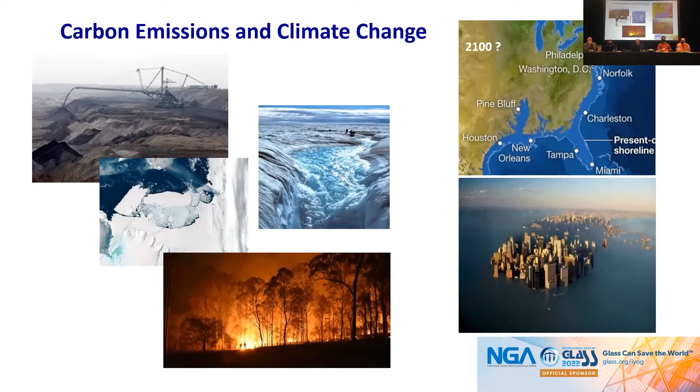It costs someone an awful lot of money to deal with those kinds of changes. So let's try and stop that from happening, and that's the carbon problem, right?

And so the challenge here is that if we're going to address carbon as a nation, as a globe, we need to address both operating and embodied carbon, but buildings are about 50% of the problem. Frequently, you see the number is more like 40% for energy, but that's the operating energy. If you look at the embodied energy and carbon in construction, it pops up into the 50 range, and it varies by country, but in round numbers, it's something like that.

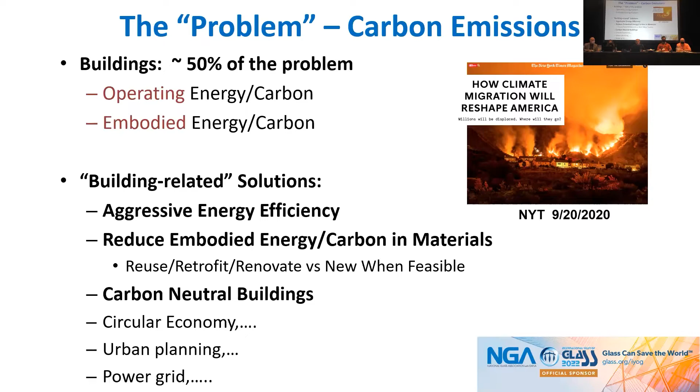So if we're going to solve the big picture global and national energy and carbon problems, buildings have to be part of the solution. Part of the problem now, they should be part of the solution. And the good news is there's a whole host of things that we can do about it. And glass and windows are going to play an important part in that.

So lately, in the last 6 to 12 months, lots of organizations at the global level, at the national level, the state level, this is NYSERDA, are coming up with plans of how do we get to 2030, 2040, 2050, and get to some variant on carbon neutral or net zero or half reductions in carbon. There's a whole variety of different flavors, but the thing that characterizes all of them is that they're big changes in business as usual.

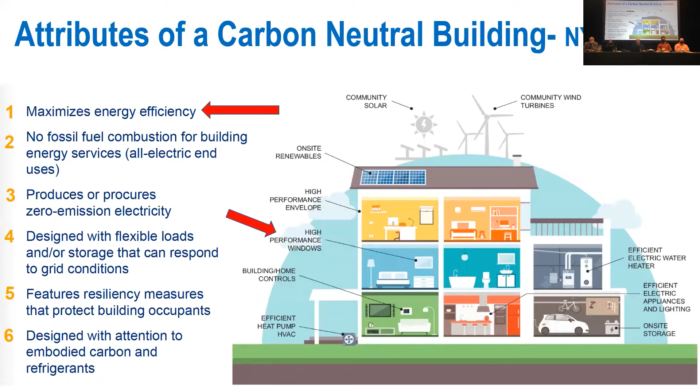The emphasis on efficiency has some history behind it. This is from 1965. This is a 40, 50-year time frame. The blue line in the middle is actual US primary energy use. And it rose a fair amount at the beginning, then flattened out. That gray stuff up there is, had we not had efficiency over the last 30, 40 years, that's where energy would be now. And the gray part is essentially what we've saved by low-e windows and insulated water heaters and all that good kind of stuff.

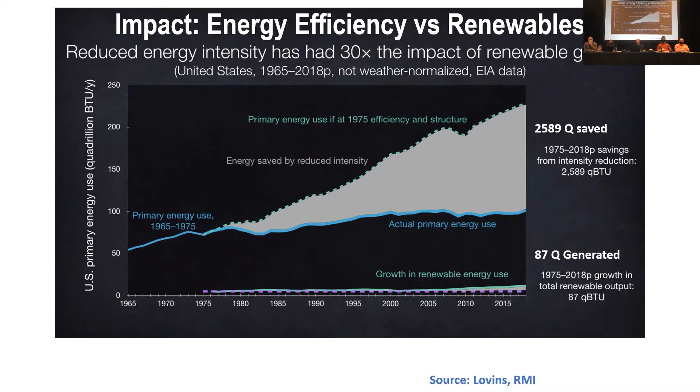The little piece on the bottom there is PV and wind and all those other good new non-carbon sources. So they're growing at a very fast rate, which is great. But the biggest savings historically have been by being efficient to start with. And so that's part of the theme here. Keep doing that. And so we're not the only ones thinking about that.

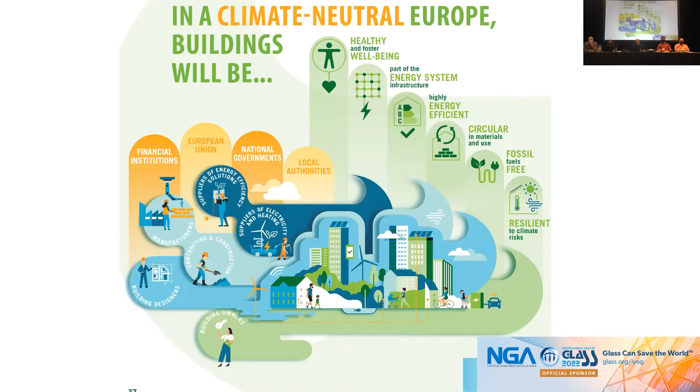We had a discussion at lunchtime about what's going on in Europe. Europe is, generally speaking, ahead of us politically anyway, in terms of thinking about what needs to be done and why. There's all kinds of interesting reports out there about the role of buildings in a climate neutral Europe, and then taken from Glass for Europe. This is a report they did. Europe set these targets of so many megatons of savings.

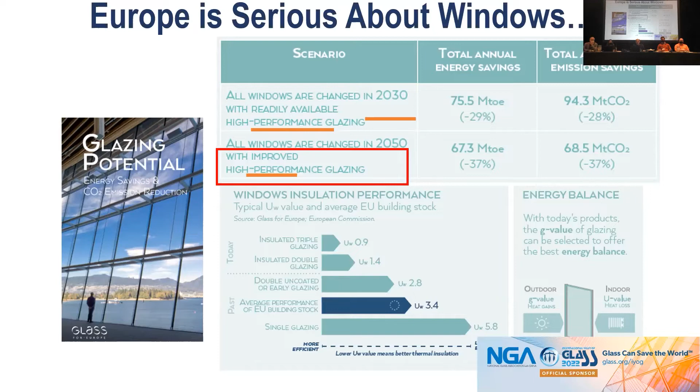And this study says, if you retrofit all the buildings by 2030 with what's in the market now, you save the amounts in the top there. If you retrofit all the buildings with improved technology for windows by 2050, you save even more. And the bottom line is, glass could provide about 1/3 of all the savings that are needed or wanted in Europe if you do the things we're talking about here. So, that's maybe a model for what we should be doing in the US to try to point out to policymakers and others what the options are.

So this is part of my thesis. If you've heard me talk before, I've said this so many times, it's probably boring, but we can do a much better job with what we have. We can get to the point where the facade, the glazing system can be equal or better than an insulated opaque wall, essentially for any climate in any area, in any orientation.

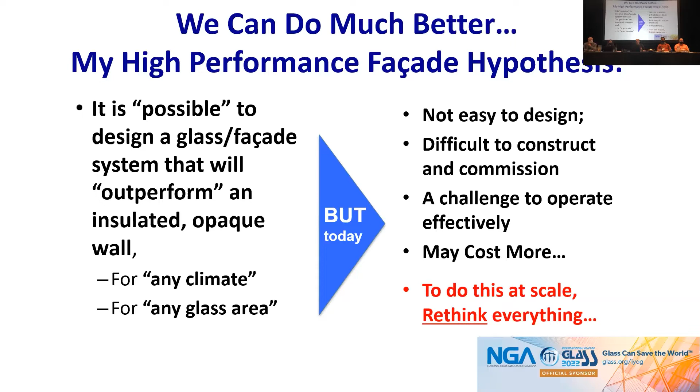Now, that's a techie statement to make. It's not going to be easy or cost effective, but it can be done. It technically can be done. I can show you how to do that. We've done a bunch of models and simulations of what this might mean.

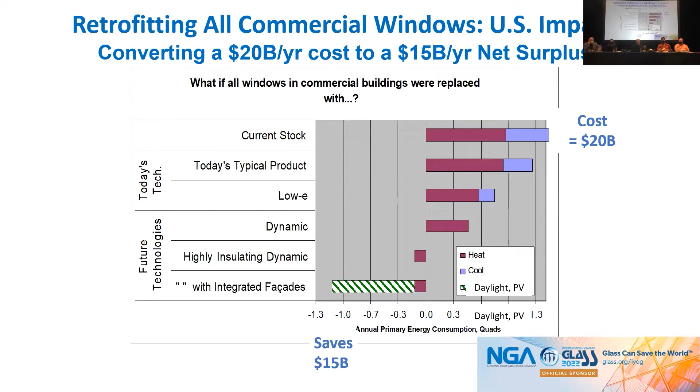Of course, that's if you can magically change every building in the country, and that ain't going to happen, as they say. So we do need to pay attention, or more attention, I think, to the properties of those windows, the performance of those windows. And in the upper left here, there's the energy carbon stuff. That's the theme of this talk anyway.

But for the last 2 or 3 days, this issue of people and comfort and productivity and daylight comes up over and over and over again. And that's good. It's coming up in the real world all the time. We need to be paying more attention to that. In general, the things that you want to do in those areas are consistent with what you want to do for energy and carbon savings as well.

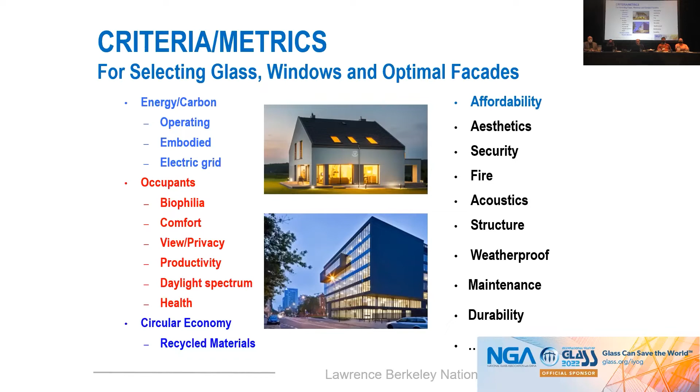In addition, on the right-hand side, if you're an engineer or an architect, you have to worry about all those other mundane but critically important issues as well. So that's why, to some extent, this challenge of coming up with the right windows and glazings is tough. It's not easy. So what I'm going to do, I'm just going to look at a piece of the problem today, just really focusing on the heating issues.

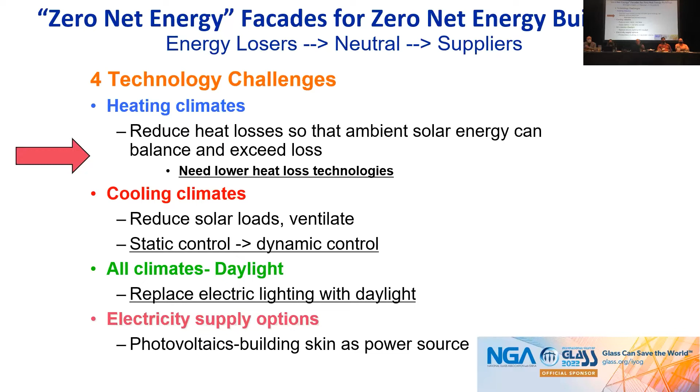There's lots of other important things that need to be done here if you're going to end up with a building that's net zero. If you screw it up, you could end up with a building that has very low heating energy in winter, but is terrible in summer. That's obviously not what we want. And then my other theme here is going to be, although I'm talking about the bits and pieces, the insulated glazing parts, this is really a systems problem.

If you've seen me talk before, I've shown variants of this slide. There's a lot of moving parts to the problem, and you don't have to deal with every one of them on every project or job, but they're all there one way or another. All the stuff in the middle and the right is other building systems, and there's all the pieces on the left that are the pieces and parts of the facade, and then there's the challenges of how they integrate.

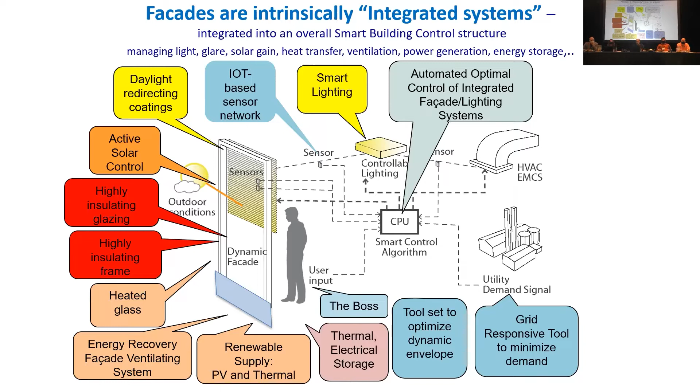For example, how the daylight control and the glazing deals with the smart lighting. If you don't dim the lights or turn them off, you aren't going to save any energy. So this integration issue, I think, is a huge challenge. And we talk about integration in terms of spacers and glass and frames, but I'm talking about bringing in maybe an automated shade, bringing in daylight sensors, and then bringing it into the rest of the building. And this is a theme that's been picked up in the industry.

Is Rick around here somewhere?

I've used this all the time from Oldcastle. This is a real challenge. It's not easy to get all the parts together and make them work at the same time at the right time. And my theme here, of course, is from the IGU to the facade, but from the facade, excuse me, to the whole building.

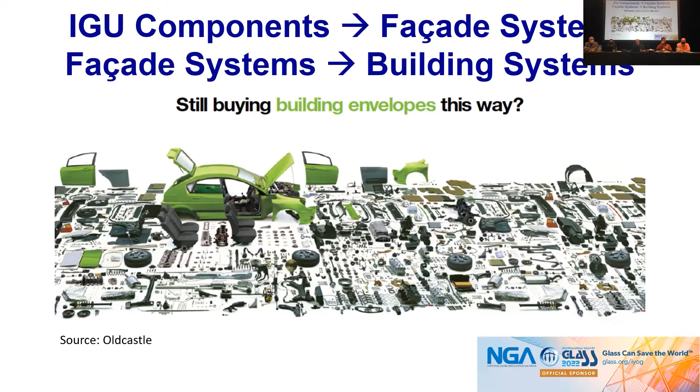So one of the most important, there's a lot of practical reasons for doing this, but my reason comes back to how much can you afford to invest in energy efficiency and how do you pay for it? So here's a different version of my integrated systems problem. And I'm going to look on the left here at the facade. I want to invest more. I'm arguing I want to go to maybe triple glazing and smart glass. That's going to cost more.

But if I move to the right here, I'm going to spend money on the heating and cooling system. And these days, I'm going to spend money on either new parts of the grid or PV or wind power or whatever, battery storage maybe. I'm going to get to a carbon neutral building. So I'm spending money in multiple places. And the simple theme here is that if I invest more on the left, I can take money savings from those heat pumps and maybe from the PV and the stuff on the right.

And we've been involved in projects where they've gone through and actually calculated it out. I'll give you one example later, where it's actually cheaper from a building's point of view to put in better glazing because it saves more money elsewhere. This is first cost I'm talking about. There's an operating cost savings that's going to happen as well anyway.

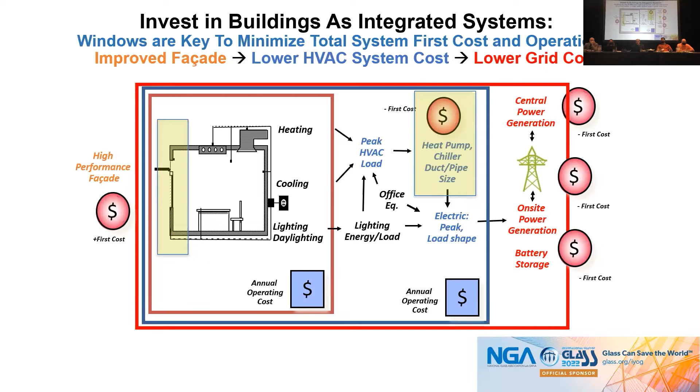So there's a lot of talk now. If you're going to get to 2050, with the savings that we need, you have to address existing buildings. You can't build your way out of this problem with new construction. Something like 50% or more of the buildings that will be in 2050 are here now. And most of them, unfortunately, are single or maybe double glazed. So there's a lot of people now thinking about how do you retrofit? And there's this theme called deep retrofit.

This is a report published recently by ACEEE, the American Council for an Energy-Efficient Economy. And they say, okay, strategy one at the top is you do everything at once. You've got money and expertise and you figure out all the things to do like I've been talking about, you do them all at once. More plausibly, when time and resources are limited, you go through a step process. And the critical thing here is you do the envelope first.

It's dumb to go in and put in a new heating plant that's sized to meet the existing crappy envelope and then go back in later and change the envelope. And the key point of this is if you do the envelope first, you downsize the HVAC and the money you save can help out there. And there's other variants here as well. There's some intermediate ones as well.

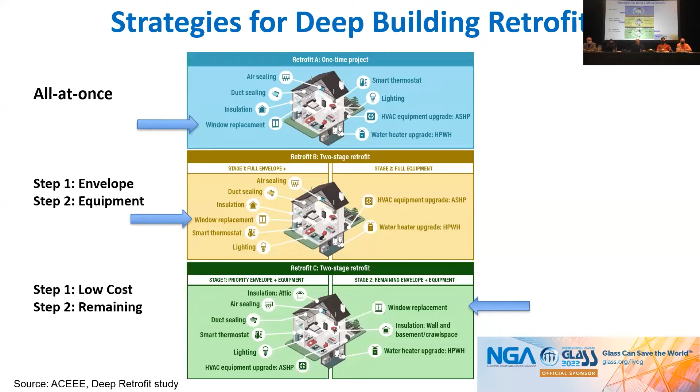So there's this challenge of getting the technical piece of it right, but getting the business solution, the construction solution right at the same time. And I'm not going to go into some of the details here, but the challenge is making these two parts of the problem really work as an integrated system. I'll come back to some of this later.

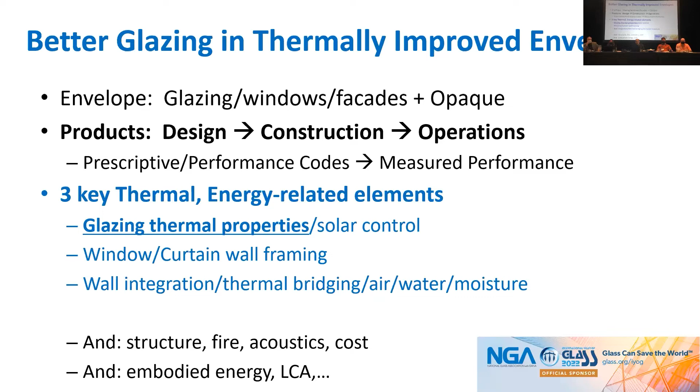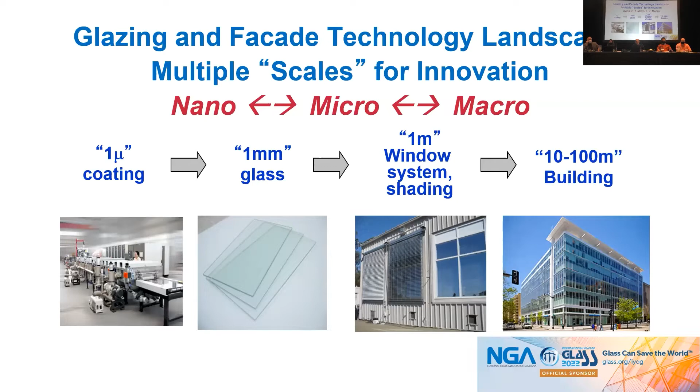So I want to spend a chunk of time now drilling down onto the IGU world. I'm just talking here about glazing properties, which is a subset of the facade, which is a subset of how you put it into the wall. You were talking before about thermal bridges and all the different pieces and parts there. Again, it's a complicated problem, but I'm going to look a little bit at, can we make the IGUs, the glazing themselves, much better thermally? And we have some levers to pull here. We can play with coatings, with glazings, with the glazing system, and to some degree the whole building.

Sort of talk about the future history of insulated glass. This is my fork in the road here. We've come to a place where we have to go to the left or go to the right, and what are we going to do about solving the insulating glass problem? So I'm going to spend a little bit of time looking at some housing issues with glass because I have a lot of data on that. The underlying issues are similar on the commercial side.

There's about 48 million homes out there out of 100 million plus or minus that are largely single glazed, 20 to 30 million a year being retrofit, but that's out of a population of 1.4 billion. So there's a huge opportunity there.

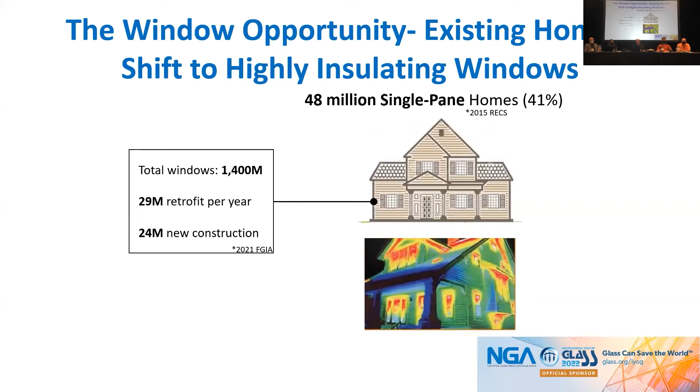In new construction, you might say, oh, well, that's okay, we have it solved now. We're using low-E double in new construction. But with the new IECC code, look at the numbers here. In a typical house that meets IECC, the windows are 8% of the envelope area, but 47% of the peak heat loss. Windows have gotten better, but the rest of the building got better faster. I mean, ceilings are R60 now. So that's a challenge and an opportunity.

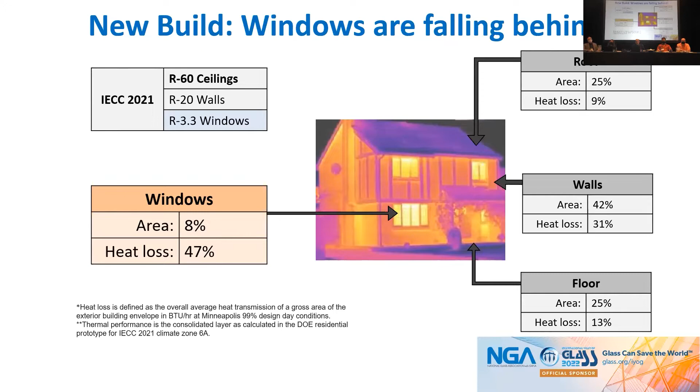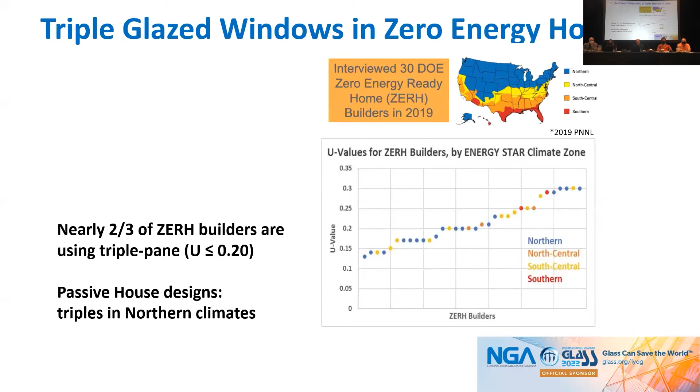Now, that's not to say that some people aren't using triples or aren't doing better elsewhere. We've done some surveys around the US. People who are doing zero energy homes, for example, these are 30 projects. Part of the group I work with went and interviewed builders, and about 2/3 of the builders were using triple glazing. We talked to the passive house world. A good part of those buildings are triples as well, especially in northern climates. So the challenge here is, why haven't we made more progress in triples?

And so here's my little universe of glazings. The ones in green here, the world of double with different flavors of low-E in different places with gas fills, this represents 80 to 90% of the market. I want to talk briefly about everything on the upper right there, what I'm calling emerging and future, and then really focus more on triples and two different flavors of triples, a conventional triple on the lower left and this so-called thin triple in the middle here.

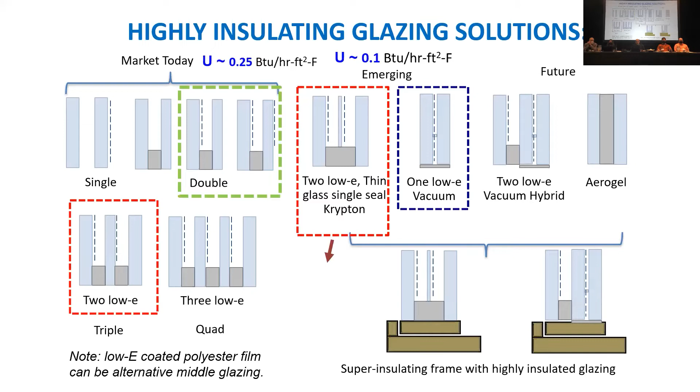So one set of emerging tech is VIG, vacuum insulating glass. These products have been around in limited form for 20 years. There's some good products out there now, some very successful projects, but not a lot of market impact at the moment. A lot of new buzz in terms of new hybrid designs for windows, new R&D, new generation VIG, which hopefully will be cheaper. Cost is always an issue here. So there's good news coming here, but it's not here now.

And if you wanted to plan a strategy for the next 5 years and address tens of millions of windows every year, VIG isn't going to be ready yet. And yet is the operative word. It's a chicken and egg as well. If the market is out there for tens of millions of low U value windows, then investments will be made faster and sooner in VIG plants. So all the stuff is connected.

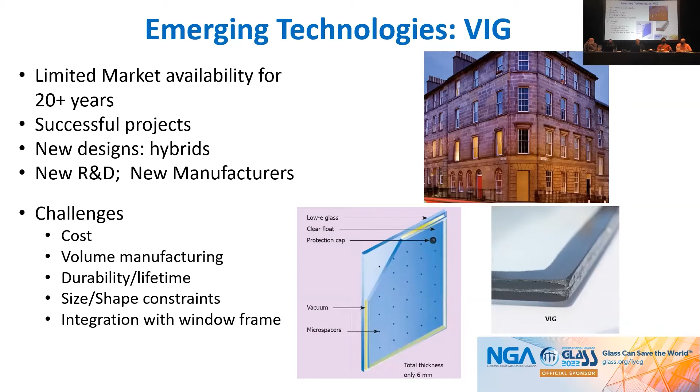The other area is aerogel. How many of you have heard of aerogel before? Everybody's heard of aerogel. Probably a bunch of the startups have come to you guys and said, hey, I got the latest, greatest, best thing, give me a little money. I've been involved in this stuff since 1980. As a scientist, it's wonderful stuff. Solid smoke is the way it was first described. The lightest material known to humankind. But DOE has been putting R&D money into it for decades, and there aren't yet real windows.

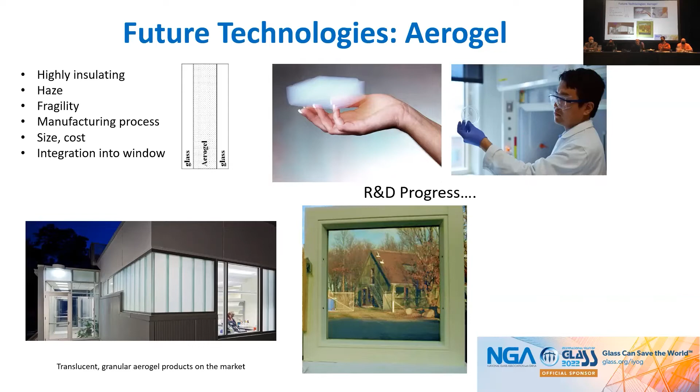Now, in the last couple of years, more funding was put in, a couple of new players have come into the market, and I heard from Tom recently that one of them looks like they might have something that looks good, but frankly, I've heard that before. It's not a statement on them. But I should mention on the lower left, there are products out there now. These are granular aerogels that are diffusing. So they're highly insulating, but they're granular and diffusing. If you want that product, it's available from multiple sources. If you want a clear pane of aerogel, you're going to have to wait a bit more.

So I'm going to focus here on the options that are on the market now, which is basically flavors of multiple glazing. I'm going to bounce back and forth a little bit between the residential side and the commercial side. Frankly, I have more data on the residential side, but the underlying technology for the IGUs is pretty much the same. So if you look at the CPD, the NFRC certified product directory, this is U value along the top scale here. You see the 0.2 U value over the blue there. Those are the triples. And then you see the doubles at about 0.3. And it looks like there's a lot of good triples there in that product directory.

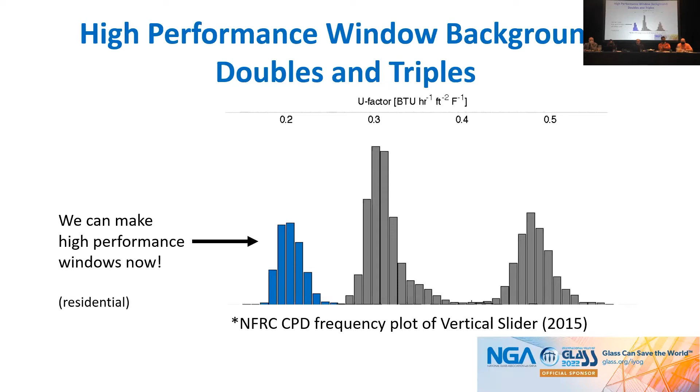But if you look at what's actually in the market, so this shows from 1970 up to now, R2 normal double glazing is the solid line. The low-E world is the dotted line, and triples are kind of hugging the bottom axis there, and they have been for 20 years now. 3% market share is what Ducker thinks it is now. I'm guessing it's less in the commercial space. So not much has happened.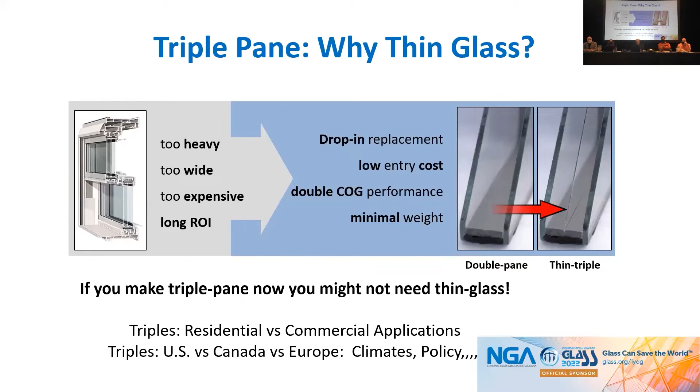So we looked at that and said, well, can we come up with a triple that's not heavy or wide, so it will fit in the existing pocket of a normal US domestic window sash, which is sort of 3/4 inch IGU, and actually deliver the performance. And we actually thought about this a long time ago. This is a patent I was one of the co-inventors on in 1991, long since expired.

Technically, it would work like a charm. The problem was in 1991, you couldn't get the thin glass that is in the middle there, and the Krypton gas. Well, Krypton was available then. It wasn't cheap, but it was available, but you couldn't get the thin glass.

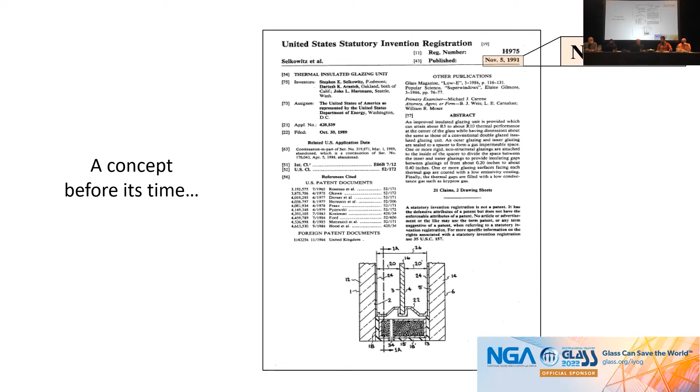About 5 years ago, I went back and looked at it again, and courtesy of your cell phone and your laptop and your TV, all of a sudden now there's a lot more thin glass around, and it's a lot cheaper. And so we looked more carefully at this, and we thought there was an opportunity here to get to triple performance, again, roughly an R5 window, a 0.2 U-value window, by packaging it in the existing glass package that was used in most of the residential sector.

This shows on the right the sort of basic concept of the thin glass in the center with a single spacer. The other reason to have a single spacer is you only have 2 possible leakage pathways, but there's no reason why you can't make the thin glass as a center layer here in the middle.

And some of the designs that partners have come up with, notice the one on the right talks about a 0.7 to 1.2 millimeter center glass. The one in the middle is 1.6. 1.6 is made by, I think, all of the primary glass guys now. The 0.7 to 1.2, that's more of a specialty product at the moment. I'll come back to that in a second.

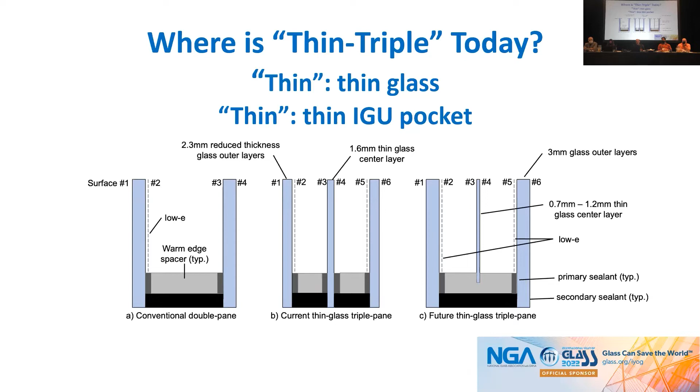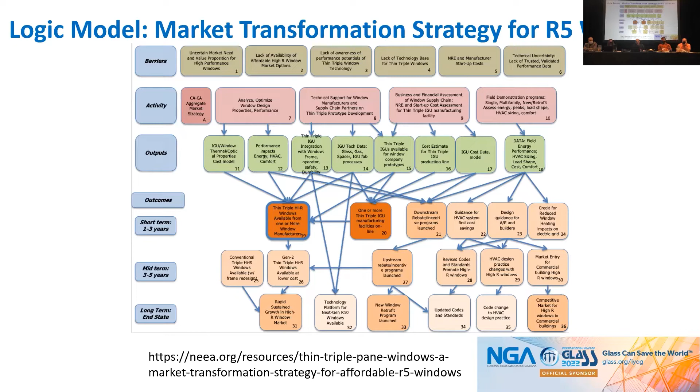And they've developed a bunch of interesting products out there, somewhat concept, somewhat real products. There's been a bunch of buzz in the industry, some of which has come from sources you guys are involved in here. And it's moving ahead slowly, but we're not committed to the thin triple per se, we're committed to triples, and the underlying problem is just not this huge market push. So let me drill down a little bit more on what's going on and why.

So the first thing to comment is that with the triple, you get about an R8 center of glass. So I'm trying to be careful here, I'm going to bounce back and forth between IGU center of glass properties and window properties, okay? So in the IGU center of glass world, a triple gives you R8. If you've got a slightly larger glass package, like an inch, an inch and a quarter, you can put 2 pieces of thin glass in there, you get an R14, which is roughly the kind of target that some of the new VIGs are looking for.

So that's great news. That says that you can get an R14 center glass without a VIG, with a quad glazing here. And then, of course, you've got to package it in a sash and frame and all the rest of it. But that's the starting point.

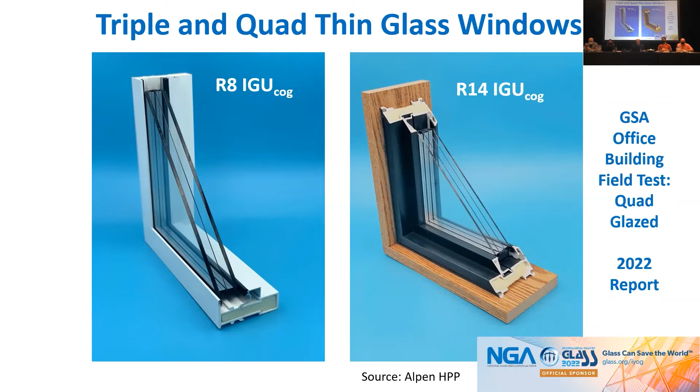Now, GSA recently, on the right here, field tested a bunch of quad glazed windows in some office buildings in Colorado. And they reported great performance and fast paybacks. The fast paybacks, of course, I mean, they saved a lot of energy. The payback piece depends on what kind of pricing they were using, and I don't know those numbers. But the good news is they work. Of course, there's no reason why they shouldn't, but they seem to work just fine. The building owners were happy. Comfort was an issue, which I'll come back to in a minute also.

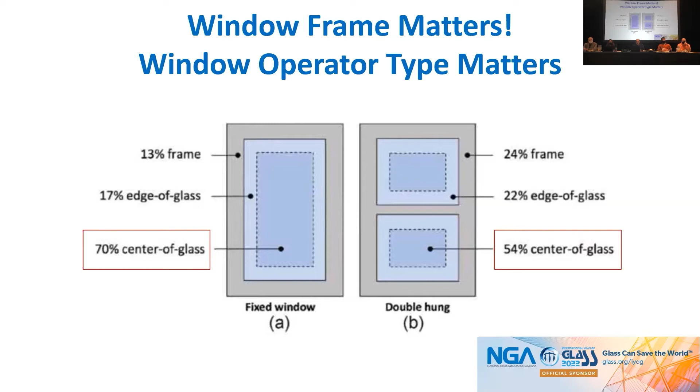And I do want to, again, clarify the IGU issue, center glass IGU from sash and frame. This is a worse problem on the residential side when you've got a lot more fractional area of sash and frame. But just as a qualifier, I'm going to show you a couple slides now where I talk about window properties and IGU properties. So that's why I wanted to make that distinction.

So here's a plot. On the left-hand axis is the center of glass U value, and on the horizontal axis is the window U value. And the bar in the middle with the tinted color, that's a 0.22 window U value, and that number is there because that's what Energy Star wants to change the northern value to.

I'll jump ahead for a second. Energy Star is in the process of changing all of their required values. The northern zone, which is about 40% of the country, we hope in the next year or so, I think this was reported on earlier yesterday by Tom, it looks like they're going to go ahead and pick 0.22 as the magic number. And from my point of view, that's great because that's going to require the industry to go to triple almost always. And so all the things that we talked about that you could do or might do or can do, we hope that they'll actually do it to meet that requirement.

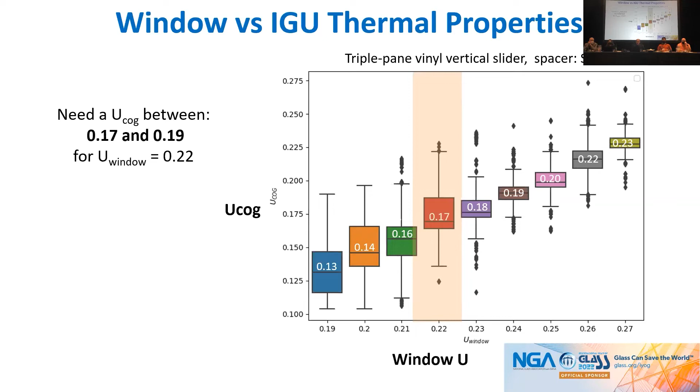But this shows that there's a whole wide range of things that you can do out there in terms of getting values at 0.22 and below. You can get down to 0.2, 0.19, and the rest of the scatter here gets to the spacer being used and the sash and the frame being used. So there are a bunch of steps, and this new Energy Star stuff would come into play in 2023. There's a bunch of things that have to happen in order for the industry to be able to deliver products at some scale by 2023. The good news is we've got a year and a half maybe to make those changes.

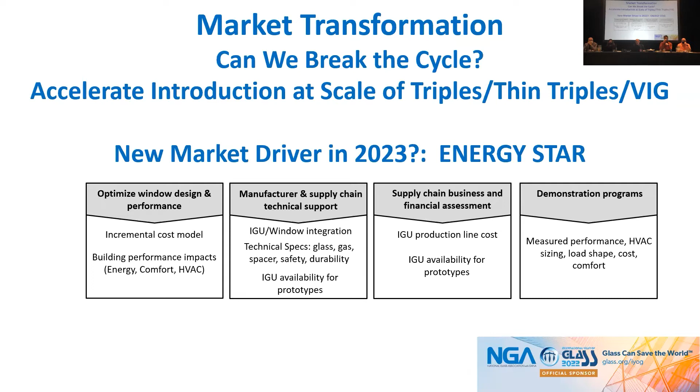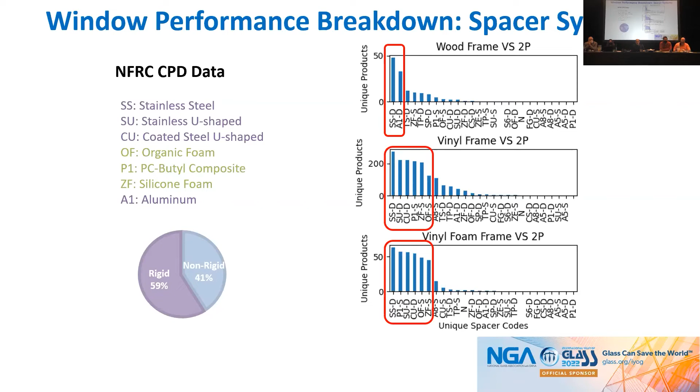And I want to just walk through a little bit of what you can glean from the current NFRC certified product directory in terms of what's out there. So we did a search. So Robert Hart, who leads this whole effort now at Berkeley Lab, did a search on the CPD database. And you can look at, for any given window type or any given U value type, what types of spacers are being used. So this is just a plot showing some of the different spacers used in a wood frame, a vinyl frame, vinyl foam frames, different choices and so on.

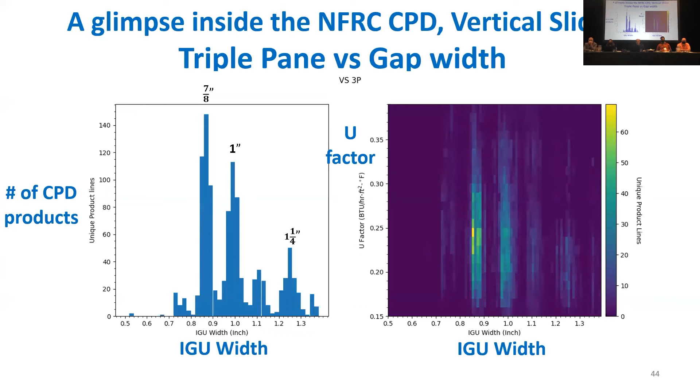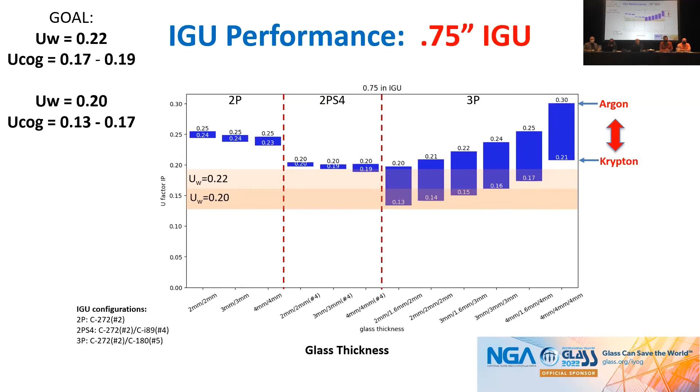So this is 3/4 of an inch. So kind of blur your eyes a little bit. Watch what happens when I go to 1 1/4. Big change, right? Actually, the doubles and the double surface 4 low E, they don't change much, but the triples now, all the triples are below the lowest end, and the difference between argon and krypton is hardly there at all. So basically, one of the challenges with the thin triple we're working on is krypton has gotten to be expensive and a challenge. If you're using an IGU that's a bit wider, you don't need krypton.

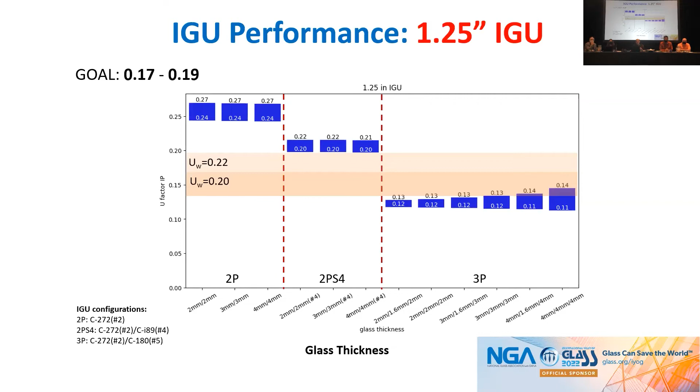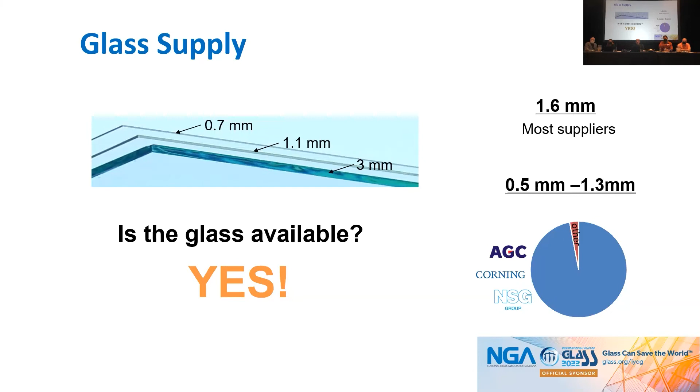So I want to go sideways for a second here. Flat screen televisions. How many of you have a flat screen television? Everybody. If you're not raising your hand, you're lying. Do you have any sense of what the volume of glass in flat screen TVs is compared to windows?

So here's a simple data point. This is approximately right. 50 million windows sold to homes last year. Each window is what, 12, 15 square feet average size, something like that. 40 million televisions sold to homes last year. Each of them is about 10 square feet roughly. So basically, the TV industry is putting as much thin glass into American homes every year as the window industry is, to within a factor of 2. That's your takeaway for the day, okay?

So basically, now, it's not the same industry, I get that, or it's not the same fabricators, and the production line for making a flat screen television doesn't look like the production line for making a window, but the underlying technology to make the glass, to cut the glass, to ship it, to clean it, do everything you possibly want to do with it, it's out there.

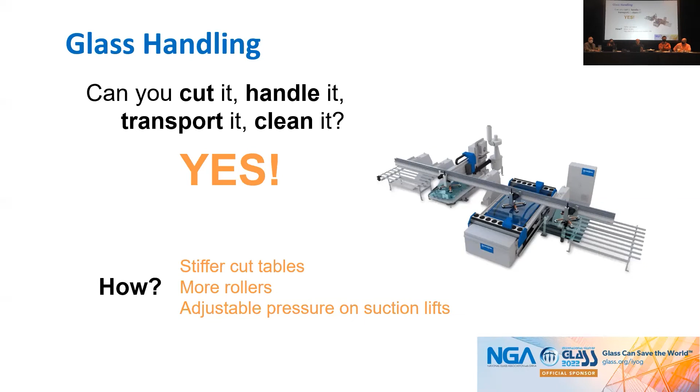It just doesn't happen to be in this room necessarily. But that means that if you want to play with it, you just go to someone that already knows how to do it. You don't have to do research and start this stuff from scratch.

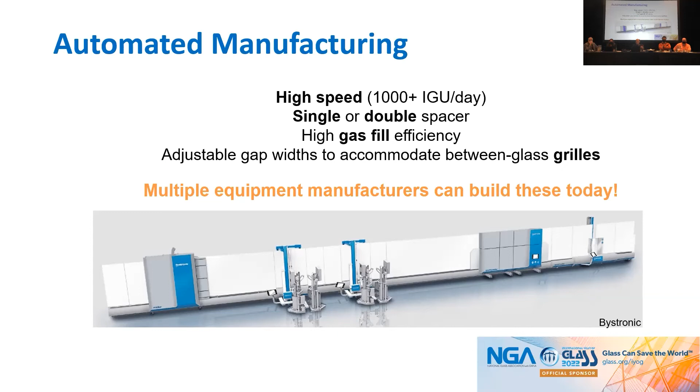Automated manufacturing. We've talked to all the IGU fabricators. They all say, we can do it. We have to tweak our design, our equipment a bit, to change the suction cups. We have to change this or that. But again, this isn't rocket science stuff. This is engineering. They basically all say, if a customer comes to us and wants one of these plants, we'll design it for them.

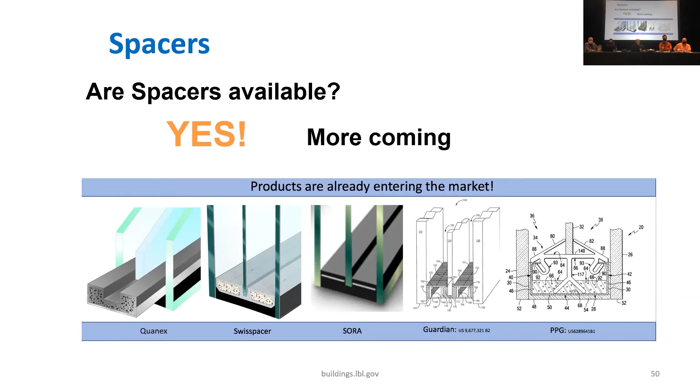Spacers, this is taken from some literature. There's a couple of spacers out there. Now, these are the single spacers. If you want the normal double spacers, no problem at all. We'd like to see more single spacers because we think there's an advantage there. There's a bunch of patent literature on this. There's a couple of products out there. Basically, there are options.

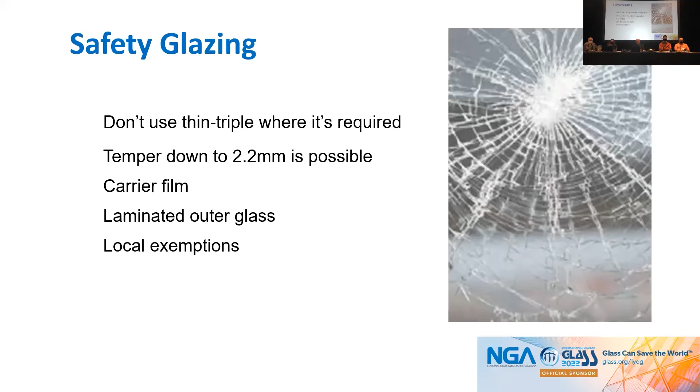And then one interesting thing is safety glazing. You can't temper thin glass. You can put a thin glue-on film on it, which can help in some cases. So basically, if you absolutely need conventional temper or need safety glass, this may not be what you want to do. Principally, you can temper down to 2.2, which we include in the thin glass world. But that's a bit tricky. So you guys know more about all that than I do.

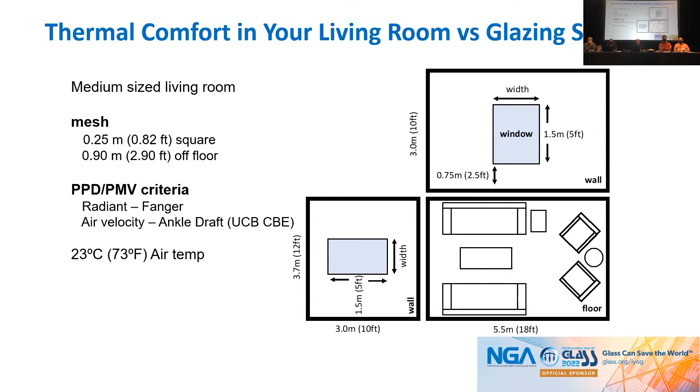So let me just close by talking about sort of benefits. I've gone through the technology part. Comfort comes up. You were talking about it just a few minutes ago, I think. We've done a bunch of comfort studies here to say, can we sell better glazing? Can we sell these triples or VIGs on the basis of comfort? So we set up this room with a couple different windows in different sizes.

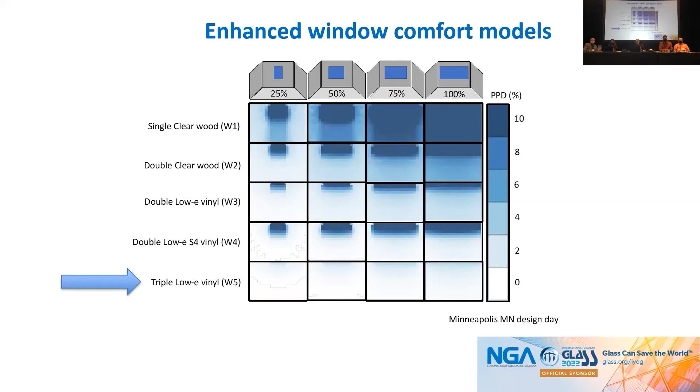There's radiative comfort, which is the surface temperature, and then there's an airflow. You've got a big piece of cold glass. You've got an air current coming down. It's called the ankle effect. Most of us have socks on, but the air flows down, flows across there and makes you colder. So all this comfort work is pretty well defined. And I'll come back to this in a second. There are tools out there that can tell you for a given type of glass and a given physical layout, whether you'll be comfortable or not.

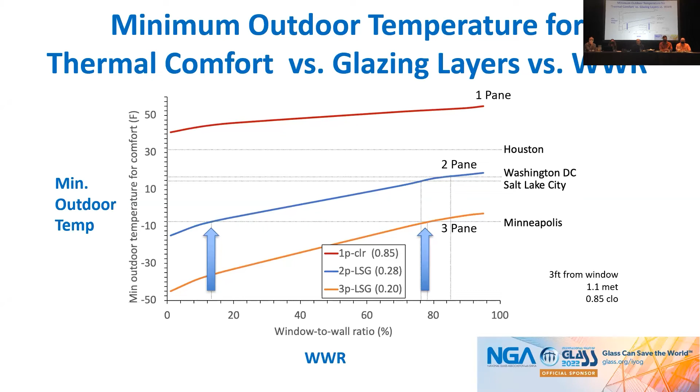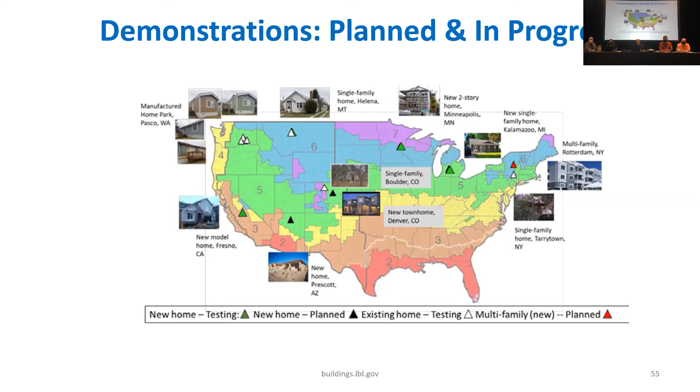So we've been doing a bunch of demonstrations to try to show that these things can be built, they can be installed, they save energy, and they help comfort. Here's a little map showing some projects around the US. This is some collaboration, DOE-funded work. These field projects are led by PNNL. There's a couple being led by LBL in California. California, interestingly, is spending some money on this, and you go, why are you going to do triple glazing in California? Berkeley Lab has a $1.5 million contract to install these, and these are all retrofit, by the way, multifamily homes and single-family homes.

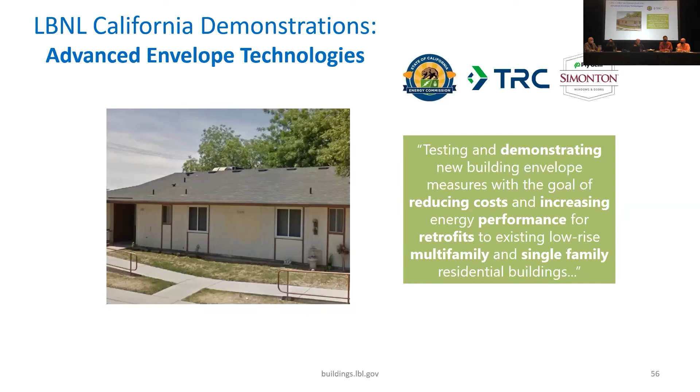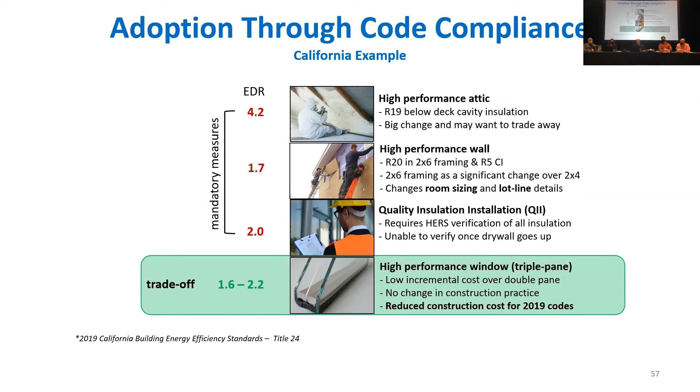That's a no-brainer. The window guy says, yes, we can make windows at less than an added cost of $10 a square foot. So they've made some traction selling builders on the idea, build California homes with triple glazing because it's an alternative way to meet the code.

And then one of the groups that we've developed, you've heard a little bit about this before from Tom, is to try to take the things going on in California and New York and other places and make them national. So this Partnership for Advanced Window Solutions, one of the first things it's doing is working on this triple glazing problem. This is being led to some extent by NEEA, the Northwest Energy Efficiency Alliance, and they are running a new program up there.

They'll launch it next year to try to push triple glazing to the market. That's going to work out well, I think, because it will coincide with the Energy Star program. And the other thing that this group is doing is try to help out in terms of finances by getting the utilities out there to offer incentives for better windows. So the idea is that in the first year or two, when the products are still a bit more costly than they should be, they haven't reached volume production cost, would be to try to subsidize the cost of it.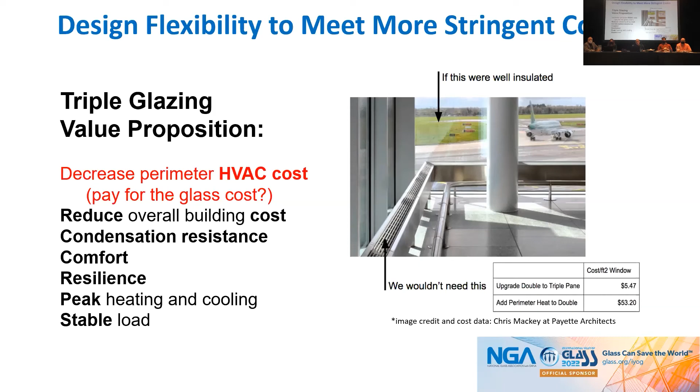So this same firm, Payette, developed an online tool that you can play with. And this will allow you to size your windows, size your type of windows, pick a climate, and then look at where you are in the room and a bunch of other things and figure out if you're comfortable or not. Definitely worth taking a look at.

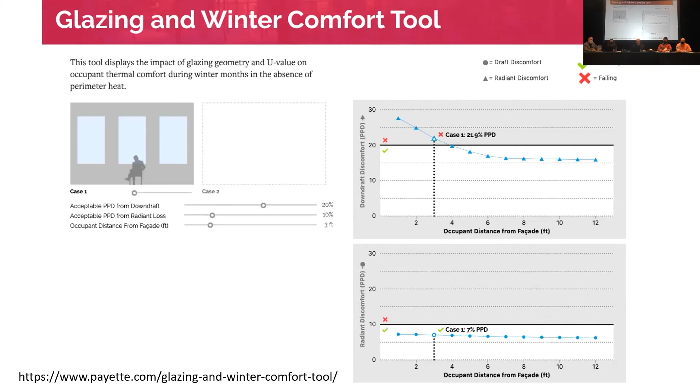And so this is part of the last 2 slides here. This is part of the bigger picture of making the dollar case, the cost case for why one should invest more in what is seen as a costly building component. So you've seen these kinds of numbers before, that energy costs, although they're a challenge, they're dwarfed by the productivity cost, by the comfort cost. I tried a new one here, this one in blue here, high performance glass, $15 a square foot once. So these other costs are annual costs.

If you say, what does it cost to put a better window in? And you take that cost per square foot of glass, stretch it out to cost per square foot of floor, it's not a huge number relative to all the other numbers we're talking about. So if this gets any traction and you get an enlightened building owner, there's some hope maybe that the barrier to investment in better facades, first cost investment, will come down lower.

If you talk to any of the big A&E firms out there, and you talk to any of the big people building stuff, Google and Apple and all those guys, they're all talking about building net zero buildings and net carbon and meeting all this good stuff. Whether they're doing it or not is a good question, but they're at least talking about it. And the AIA 2030, and all the big architectural firms say, you know, every building we do is going to be net zero, et cetera. You take all that with a grain of salt, but at least they're saying the right thing and moving in the right direction.

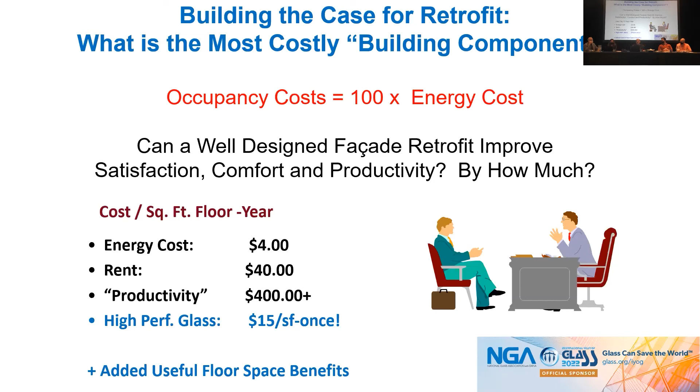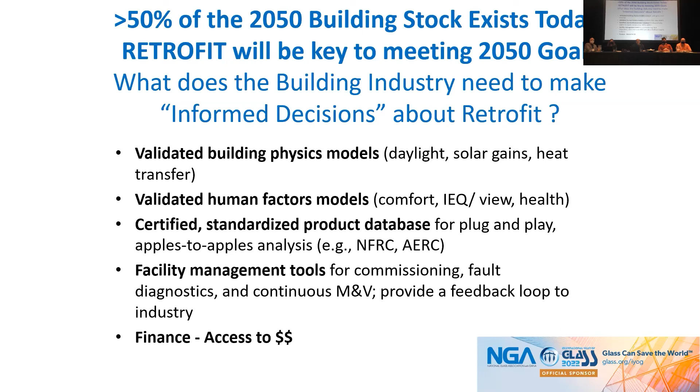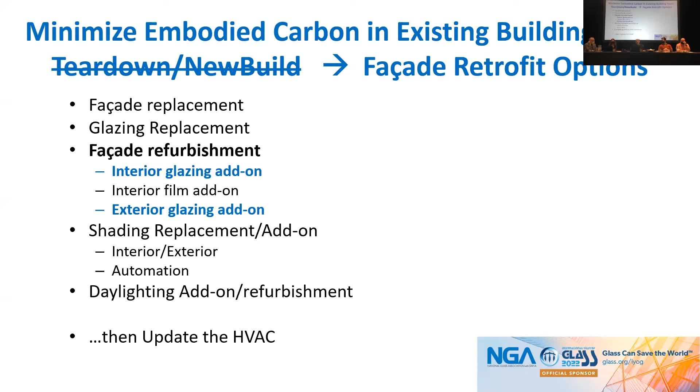I want to close on retrofit because I talked about the importance of that. If we're going to get 50% of that stock fixed well before 2050, we need to retrofit. I won't go through the details here of why it's a challenge. But two different things. If you can afford to replace the facade or the glazing, the top two items here, great. That gets pretty expensive and pretty disruptive in terms of what goes on inside the building. So there's a lot of interest now in add-on glazings, both inside and outside.

And here's a project that GSA recently funded. So GSA, again, owner of all the government buildings, Green Proving Ground. This is Alpen that did that triple and quad window. They've developed an interior glass retrofit panel that's light enough for that woman on the right there to handle that full-size sheet. It's simply a piece of 1 or 1.2 millimeter glass with a thin sheet of plastic on it and an edge frame, and it can be retrofit rapidly without disrupting interior operations.

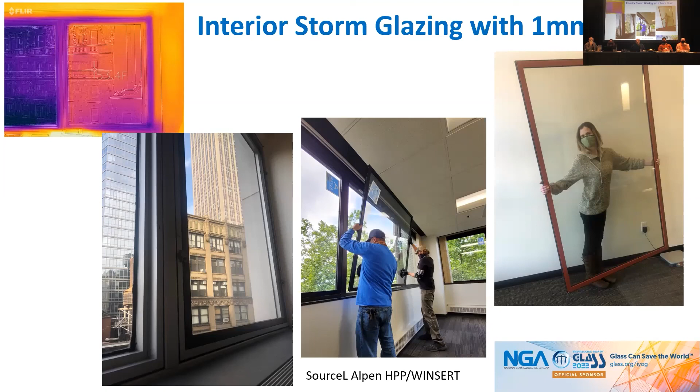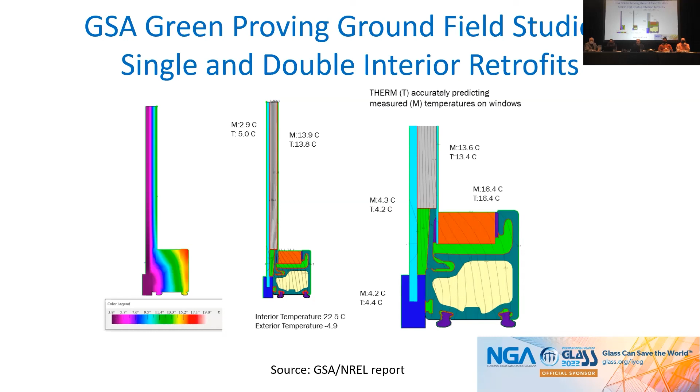It seals the window. There's one version that's single, there's another version that's double. You can see some isotherms here. A simple solution to snap it into place, can be retrofit easily. And GSA just did a study of that in 8 or 10 different climates. The bottom line here is this stuff has paybacks from 5 to 10 years. And 5 to 10 year paybacks are the kinds of paybacks that building owners like to see. They're saving 12 to 15% of the energy and paying back at that rate.

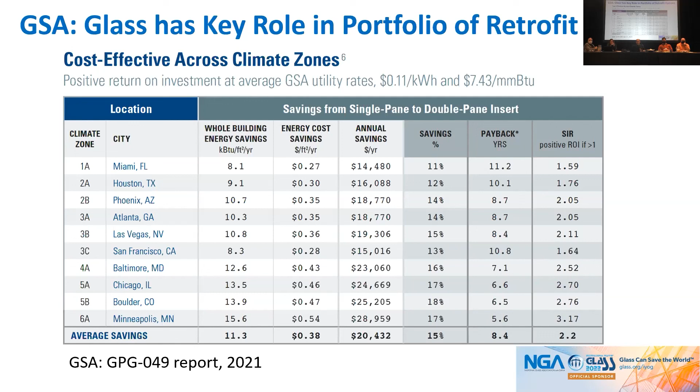So there are certainly opportunities in new construction. There are a number of opportunities in existing construction, and we need to take advantage of them more aggressively. So closing with the NGA theme, glass can at least help save the world. I buy into that. I think the challenge here is that we need to have this combination of marketing. We need to market what we have, and when there are gaps, do some innovation, some R&D that fills those gaps. I've given you some examples of what's been going on there.

I think it's going to be critically important, in terms of getting owner response, to package all the occupant benefits with the energy carbon savings. Some of them will respond to energy carbon in dollars, but some of them will respond to these other issues as well. We need strategies for different timeframes, and some of those strategies will be new construction, some will be existing building retrofit. So we need strategies for those retrofits.

And I think the other thing that's come up a few times in the last day is this organization, or any glazing organization, and I'm involved with the facade tectonics folks and others, by itself, it's not going to change the world, but there's a lot of other groups out there, the Alliance to Save Energy, ACEEE, the New Buildings Institute, Institute for Market Transformation. All these groups out there are pushing buildings, and they want solutions. They want envelope solutions. They want help, and you all and others can partner with them and help. And I think most important is this stuff is not particularly easy, but we've got to stay focused on it and keep pushing ahead, which is why it's fun to come to meetings like this.